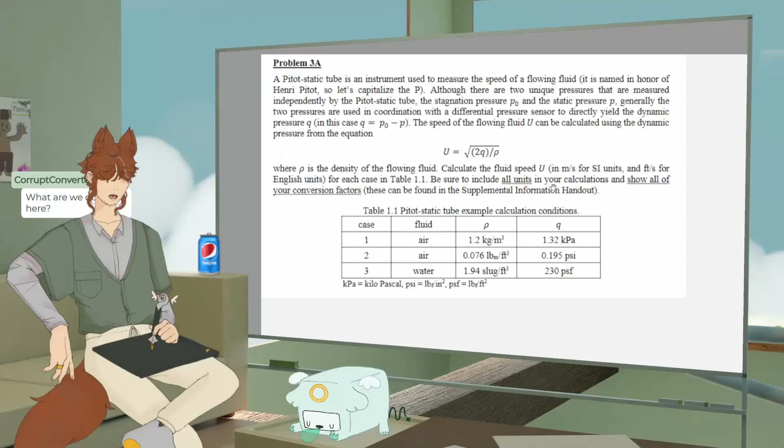Well, this is a series solution to a linear differential equation, but we're actually doing fluid mechanics. Oh, I forgot if I have to put my heading. Okay, we're gonna turn off the heading, we're gonna turn off the heading. I have to do my stuff on engineering paper. Whoops, don't look at that. But yeah, I'm an engineer, I'm a mechanical engineer in undergrad, taking a fluid mechanics course, so we do fun stuff here.

Generally my VODs, or my streams, are kind of all over the place because I'm learning the stuff, I'm not teaching it. Sometimes I'll teach it, but that's usually not when I'm taking a course. So yeah, we just hang out, we just chill out, we do some math, we do some physics stuff, we do some complicated math sometimes. It's usually not that hard math, honestly.

Yeah, so for this one, let's see. So we have a Pitot static tube, which is like a little tube that we use, that uses differential pressure. Two unique pressures measured independently, stagnation pressure and static pressure, and then a differential between them, and we can figure out the dynamic pressure.

I think this is a units question. Calculate fluid speed U in each case. So we can do that. But we have to make sure we do the units correctly.

So let's say for case 1, like, writing is important in classes like these. Math has largely been investigating tessarines much deeper than they have been before. Ooh, that's exciting. A lot of the math that I do is very applied. Even when I did comp sci stuff, it was mostly for AI, like linear algebra for AI, or matrix manipulation, things like that. So I started learning real analysis at one point, but have not got back into that, sadly. I like it though, it's really cool. I want to do more theoretical math, but it's hard because I haven't, it's a lot of proofs. Writing proofs is hard when you haven't gotten instruction on how to read proofs.

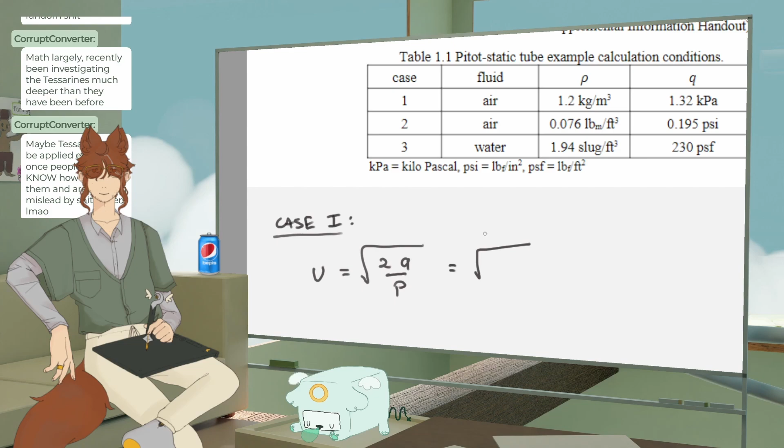Maybe tessarines will be applied eventually once people actually know how to use them and aren't being misled by bad papers. Wait, what are they? Is it a geometric?

Tessarines, let's see. Bicomplex number. Complex numbers are... split? I don't even know what split complex numbers are.

You want to try? I mean, if you have a good introductory definition. I always find it's a good way to test your knowledge by trying to explain things. Although I've heard in math, people are like, well, I can't explain anything because my field of study, people don't know enough for me to be able to tell them. There's too many words. Give me a sec to explain. But as an engineer who deals with things that are also complicated, I never really have an issue, but maybe it's because it's applied. It's a little easier.

Let's see, I'm just going to go into regular units. So 1.32 times 1,000 pascals. We love our units here. So Pascal is force per area, so that would be pounds force. Nope, we're in newtons, newtons per meters squared. And then kg per meters cubed.

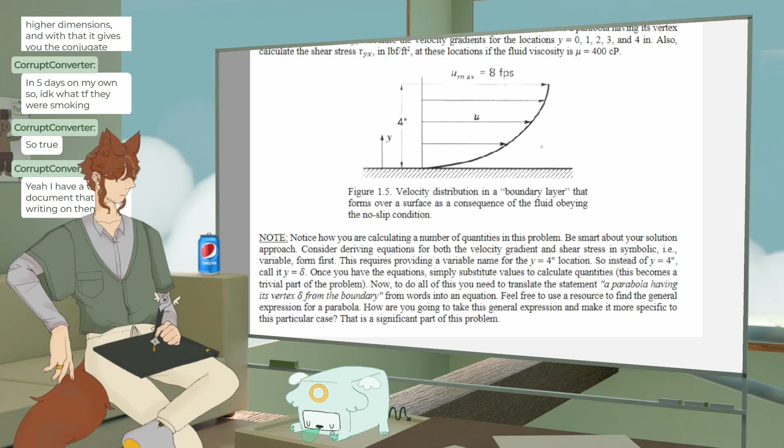No, that's so real though, because sometimes I'm like, oh I get this, and it's like, why did other people not see that? But I think it's just because—I don't know, when you're still in school your brain is really flexy, and it takes longer as you get older to flex that brain. The whole document thing you're writing? Wait, you're in high school? That's crazy, dude, that's awesome.

Okay, assuming velocity distribution profile, whatever, shown in the diagram, which is a parabola having its vertex 4 inches from the boundary. Having its vertex... oh I see, it's this way. Okay, I have to remember what that equation is.

My school helps me with none of this at all. Yeah, that's how I feel.

Calculate the velocity gradients for the locations. Also calculate the shear stress. Let's do the—wait, calculate the velocity gradients. Can I do that right now? I may not be able to do that. Notice how you're calculating number of quantities. Consider deriving equations—I don't know if I can do that.

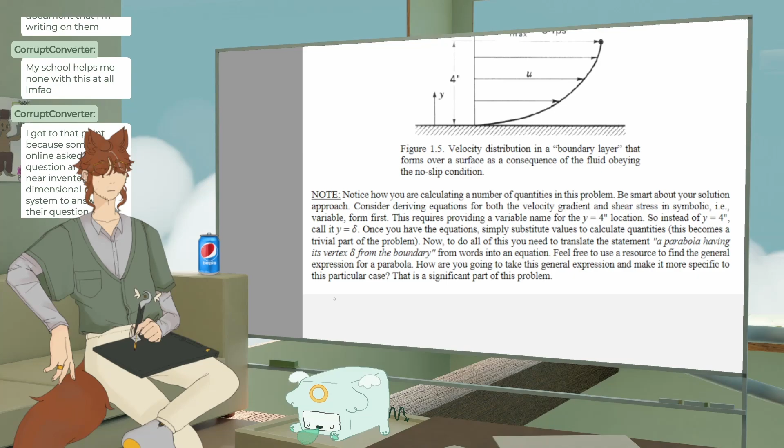Maybe I can, so it would be... I mean, I can calculate... wait, okay no, I maybe can. Can I? I have one equation. Well, to preface, I started learning stuff from this class before my professor got to it, so I know more. But the only thing he's actually given us is just this.

Nope, wait, which side is it? Let me remember, I think it's this way. What is it? Tau-yx? I don't know, it depends on the plane. It's the only equation we have. So I don't... this is the deformation rate, but that's not the velocity. But it could be the velocity gradient, because gradient is like, hand-waving, a distribution, right?

Got to the point because some bozo online asked me a question. I damn near invented a 4-dimensional number system to answer the question they asked about why, if you conjugate everything on both sides of the equation, negating all instances of i, the equation still holds true.

But wouldn't that be inherently true, hopefully, for a coordinate system? Oh wait, no, if you conjugate everything. That is interesting. Because that wouldn't be the case for like... it wouldn't be the case for regular complex numbers, right? I mean, not necessarily, inherently. When you say conjugate, are you saying like x equals a plus bi? Are you saying you're multiplying both sides by whatever's over here, and then just times this? Or like its own conjugate? It's not true for the real numbers, yeah.

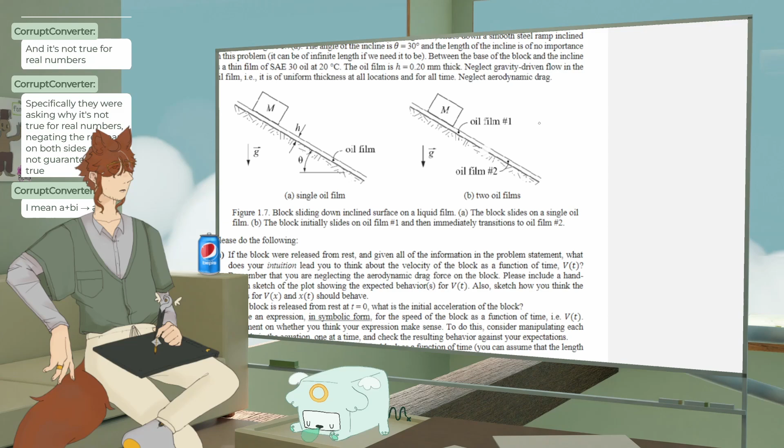Basically, they were asking for why it's not true for real numbers. Negating the real part on both sides does not guarantee it is still true. Oh, well that makes sense, right? Doesn't that make sense? Because aren't you sort of changing the numbers, in a very dumb way of putting it. Maybe I'm not understanding. Also, wait, so the BI counts as the real part? Or... in your complex part is the CD? Stuff? Both of the two?

Okay, yeah, I could do this one. Alright, so we have a copper block, and a smooth steel ramp. This is such a big problem it doesn't even fit on the slide. bi is imaginary part. Oh, not tessarines. Got it.

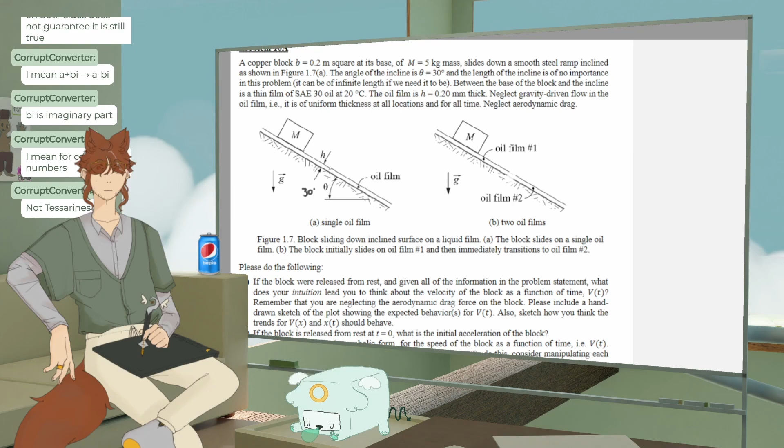We got an angle of incline, 30 degrees, put in there. And the length of the incline is of no importance in this problem. Between the base of the block and the incline is a thin film of SAE30 oil. Okay, that's important, gonna have to look that up in a table for viscosity. Neglect gravity-driven flow by oil film. Okay. Neglect aerodynamic drag. Okay.

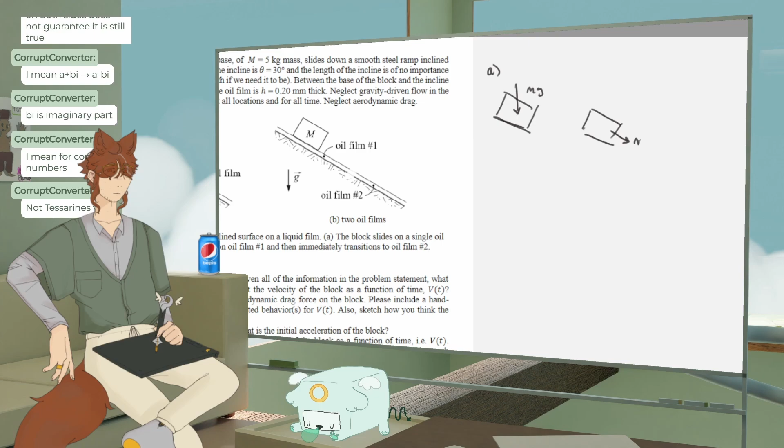Block released from rest, and given all the information in the problem statement, what does your intuition lead you to think about the velocity of the block? There's probably some, here we'll do A over here. Probably some, okay, remember you're neglecting the aerodynamic drag force. So you'd have your block, and you would have gravity, just a simple little FBD, and then that would cause some acceleration on the block in that direction.

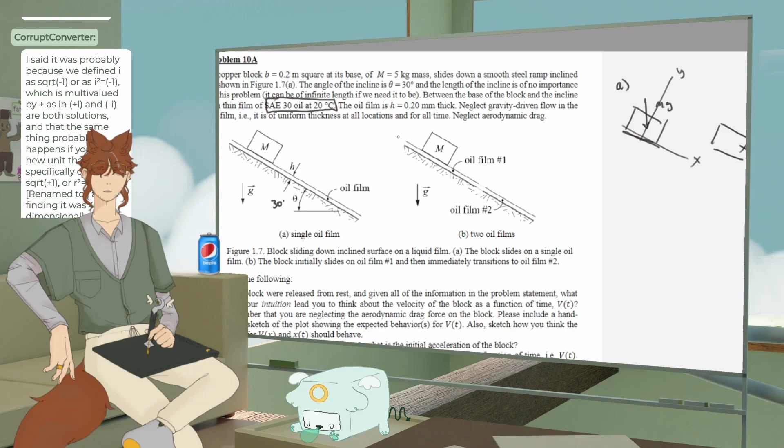And would it be constant? I think what we're saying, we're neglecting gravity-driven flow, so we're gonna assume that - okay, we're not neglecting the fact that the oil needs time to start up as well, I guess. So I think this acceleration would change, but it would get to a point where it's steady. At the beginning, it would change because the velocity of the oil is also sort of getting to the point where it's... maybe the block would be driving that, so its acceleration wouldn't be. There'd be some amount of force though. I don't know, I don't think it would be mostly. It would probably mostly look like a constant acceleration, I guess. So something like that.

Let's see, I said it was probably because we defined I as square root of -1, or I squared equals -1. Wait, let me read in a bigger thing here, those eyes are too small for my eyes. Let's see, which is multi-valued plus or minus, as in plus I and minus I are both solutions, and the same thing probably happens if you add a new unit that is specifically defined as square root of +1, or... yeah, that makes sense.

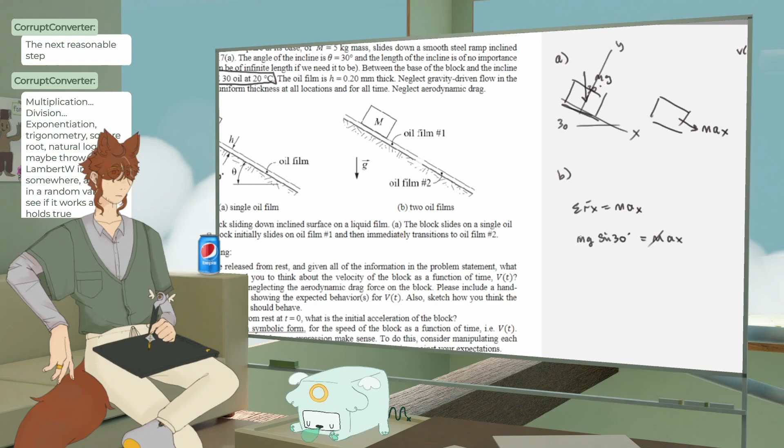What are we in? We are in kilograms, so it'll be 9.8 sine 30 equals ax equals...

The exponential series and the main four trig function series are the most useful things I've had thus far. How are you defining them? Like series as in sums, or series as in just a chunk of stuff?

9.8 sine 30, 4.9, oh that's nice. And that's in, I should put units on this number. 9.8 meters per second squared, and that's meters per second squared.

Derive an expression in symbolic form for the speed of the block as a function of time. Comment on whether you think your expression makes sense. Okay, that's easy, we take an integral. Integral of a dt equals v.

Something like that. Oh, infinite series, oh that's cool. So just like power series versions of them, or...

It's like what I'm doing in differential equations. It's funny because what we're doing this class for is like Laplace transforms for that stuff, but all about having a metal rod with a temperature at one end, and how that temperature propagates in various situations over to the other end. It's like a whole class just about that. The power or Taylor series, that's cool.

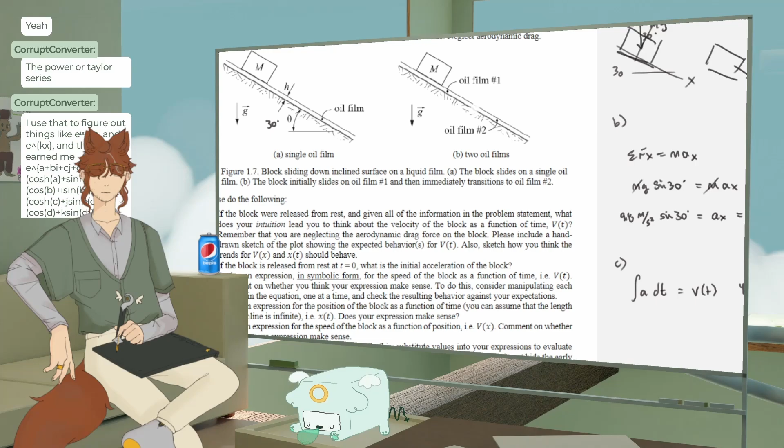So you're just proving that those things hold true as well? Or just having ways of that's like very... How did you get into doing math stuff? My high school would never have had me do that stuff.

I need another force, I need another equation. It's loading.

Yeah, only having one equation for like this rate of deformation. I stopped listening to myself. That's true.

Yeah, I like to teach myself stuff. It's more fun that way, for sure. Better experience, I think. But you know, I will say there are good professors you'll meet if you go and meet professors, I guess, is the caveat there.

Let me also grab my... I'll put that up, supporting documents, sulfuric acid. Good supporting document, just called sulfuric acid.

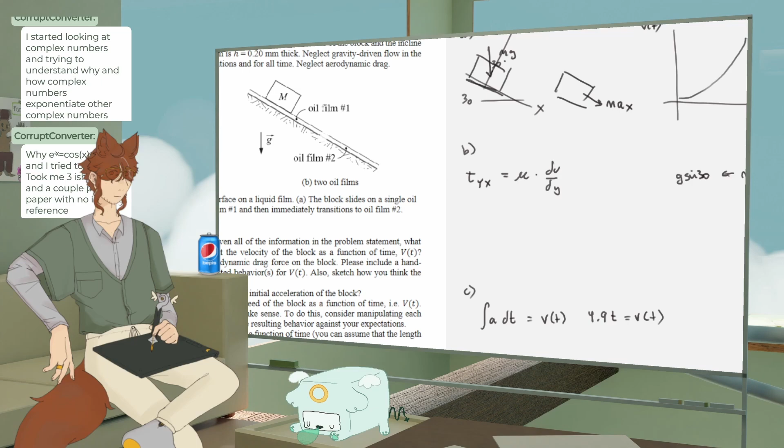Talking about complex numbers - exciting, interesting. Started looking at complex numbers and trying to understand why and how complex numbers exponentiate other complex numbers, why e to the ix is cos x plus i sine x. I have to try to prove it. Took me 3 days and a couple pieces of paper with no internet reference. Oh, you're just built different, for real. My brother does that kind of stuff, he likes to prove things like that. I was always much more like, I wanna think about models physically. I don't want to have to make models, but I enjoy thinking about the relationships of things, like proportionalities, or direct relationships or inversely proportional. Because I like to go, oh, if I make this thing bigger, this thing will be smaller.

Yeah, du dy. I think there's got to be one other thing in here though, because we need something about how du dy.

Okay, so we can define this at least. So this is wrong, get up here. A free body diagram is not free - there's a force this way, somehow. Well, I'll call it F. I don't know.

Be an entire Desmos - wait, did you say library? Whoa, what? Built different, autism. Hell yeah. Dude, I think neurodivergency is just like... that's how we get certain great things in the world. You know, find your niche and just go all in. Being a jack of all trades is no fun. I love people who zero in.

Okay, this is G sine 30. I'm gonna leave it in, I'll just call it A for now. Well, I guess A is not gonna change, so I'll do 0.2 meters squared, I'll just square the whole thing. Okay, so we have this as a known, and this is a known, which means we can find this.

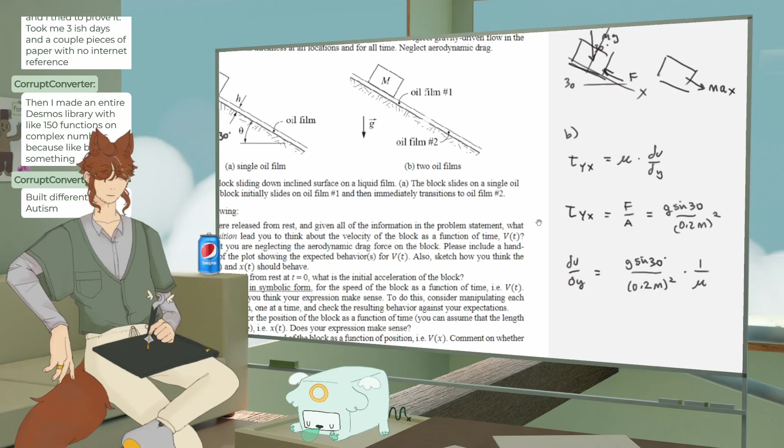It's like du dy is gonna equal G sine 30 - I guess I could even put theta in there, but theta is not going to change, so they're not really asking us for a changing thing, that's fine - divided by, times 1 over the viscosity, which is going to change from this, if in the second example the oil films. So we got that. Now there has to be something about this deformation and the proportional stuff.

Okay, is that for non-Newtonian stuff? Oh, I gotta read that later. Surface tension, okay, that's not super useful. This viscid and inviscid, or viscous and inviscid. Laminar, yeah. Okay, useful definition of streamlines, I should look at that. Shear stress for a non-Newtonian fluid - that is, I want a Newtonian fluid.

Wait, oh that's fine, is it a 1D flow? Yeah, it's a 1D flow, don't need to worry about the dimensionality of flow. Where is this, do I need fluid dynamics? But the next chapter is fluid statics. I don't understand, we need something to determine - unless it's just a one variable equation, but that seems way too easy, it's definitely not it.

Okay, now we get into differential equations. Thank you, the gradient. Let's see, the pressure gradient is equal to the specific - I don't care if it's equal to specific gravity, I don't need that, I don't need a pressure gradient, bro.

Oh my gosh, you have a little link to it. That's so cool, wait, let's see. I love it. Whoa! Oh my gosh. Wait, wait, that is so cool. Wait, we're going on a field trip. Look at this, that's so beautiful. What the heck? Wait, that's so gorgeous. Oh, it's so beautiful. What's the red? Whoa! Oh my gosh, you can change it like with this?

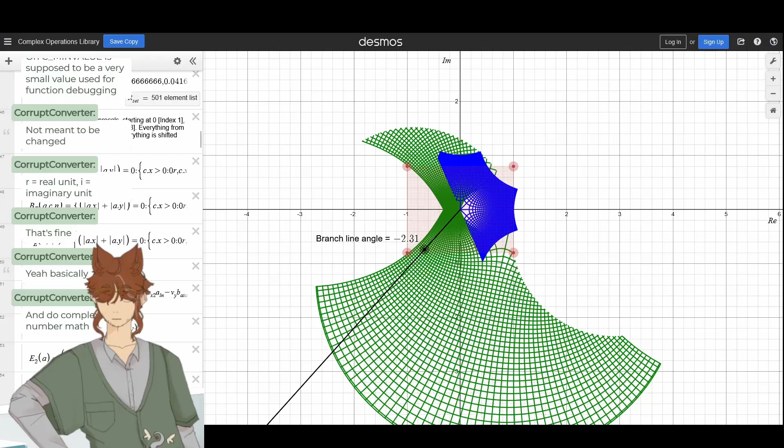Oh, so you can just import these functions into something that you wanted to do, and then you can draw it. That's where you change it, I see. Whoa, that's really cool. How do you, what even is this?

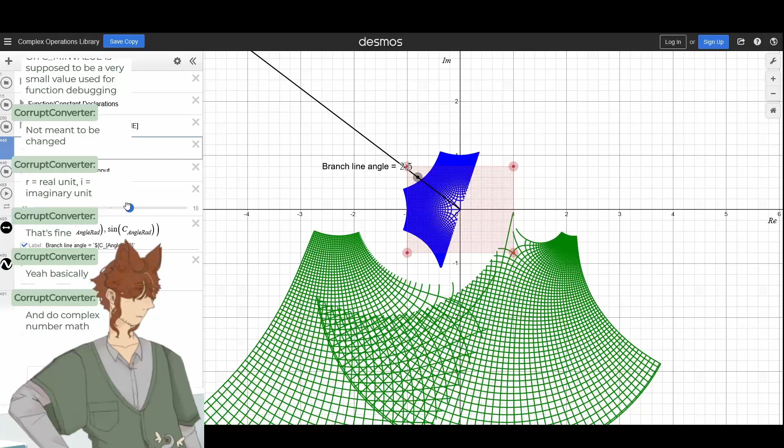That's crazy, I can't believe you made this. This is like awesome. This is like actually really, really cool.

Wait, I can play it and it goes around in a circle. Wow, it's like my baby sensory. I love math. Dude, people who can do this stuff are like wizards to me. This is like spell casting.

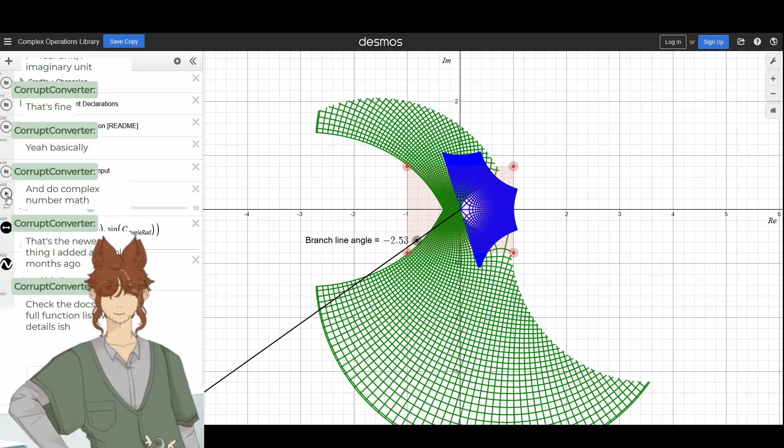This is literally just, check the docs for the full function list. Oh yeah, I've been opening the full function list. I just haven't, you can't, the chat is in the way. Get out of there.

I like how you put in colors as well, that's awesome. This section is unfinished. The shape reminds me of a Mobius transform. Oh, the README folder? Where is that? Oh, here.

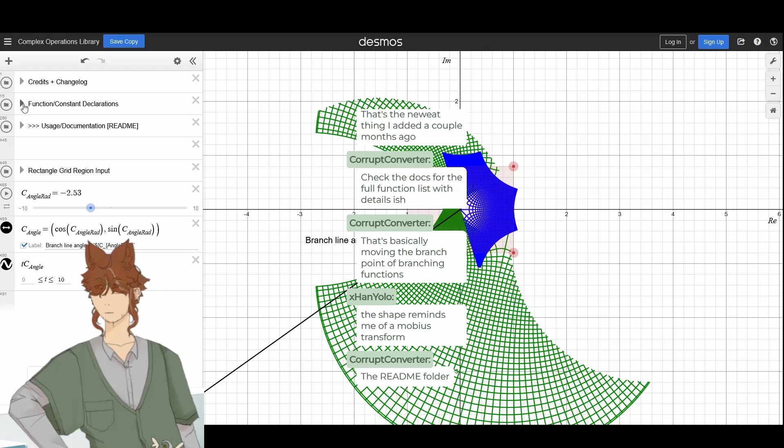The real unit, okay so it's real and that's a match. Oh look, you even labeled the axes. Oh my god, you're cracked. Okay, to access the real part of P, use P dot X, imaginary part P dot Y. E circle, return complex point.

This is such a cool visualization. How did you make the swirly graph thing? Like, I never label my axes. Oh, I always label my axes because, okay.

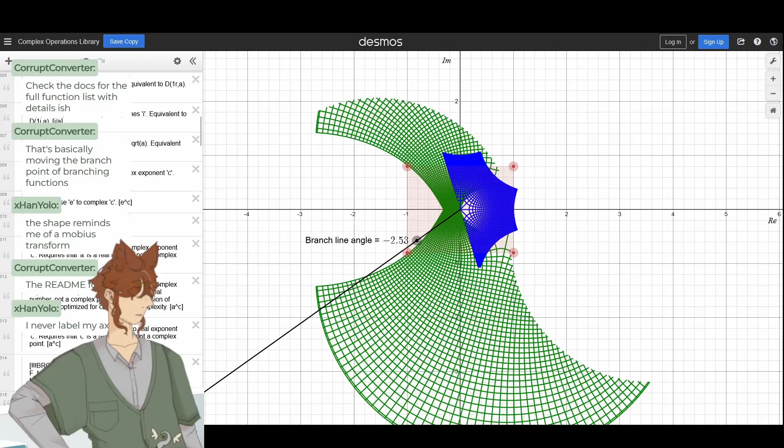In engineering, people like to label their axes whatever the hell. I don't like how Minecraft uses messed up axes, and so I just never assume, so I always label mine.

Tetrate infinite, what? These are so cool, E to the complex C. Wait, does it also graph? If you just say like, I don't know how to write this. Wait, give me something cool to write.

That's the last folder, takes the grid and plugs everything into it through a complex function. Oh, I see, P grid A. Oh, let me move.

Units are a waste of paper? No, literally, you can't. In engineering, they crucify you if you don't write all your units. Change this to modify the density of the grid. Whoa, I can make it big as hell. That's awesome.

This is so cool, everybody go look at the link, it was in chat. From me putting chat in the way, just replace everything after the equal sign in the P grid A. P grid A, replace it with what?

Oh, to graph something cool? Oh I see, I don't know what I would put. Like, can I put sine x? No, no I can't. No, I can't, I don't know. Like with F cosine, F underscore.

Oh, F underscore like that? No, have to replace everything. I see, we can't have a cool rectangle. Wait, when you say underscore, do you mean like sub? Really, like that?

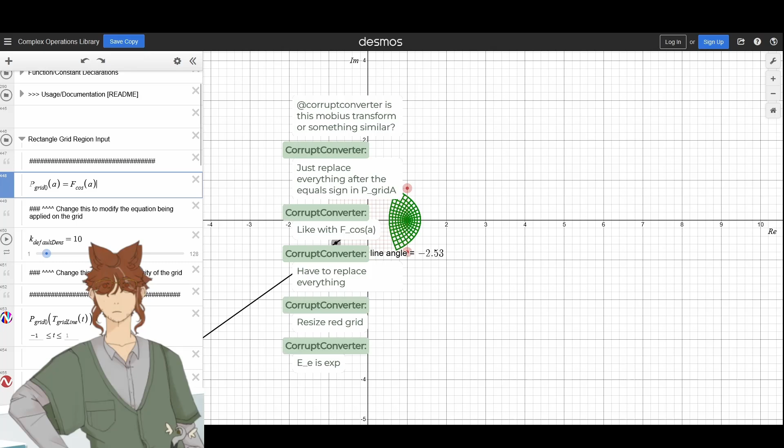Whoa! Wow! That's so sick, how do you? Whoa! What is that? What does it going down like that mean? Where is it? Because that means it's in the imaginary space, right? And any real bit is along the real axis. That's wacky. That is so sick, though.

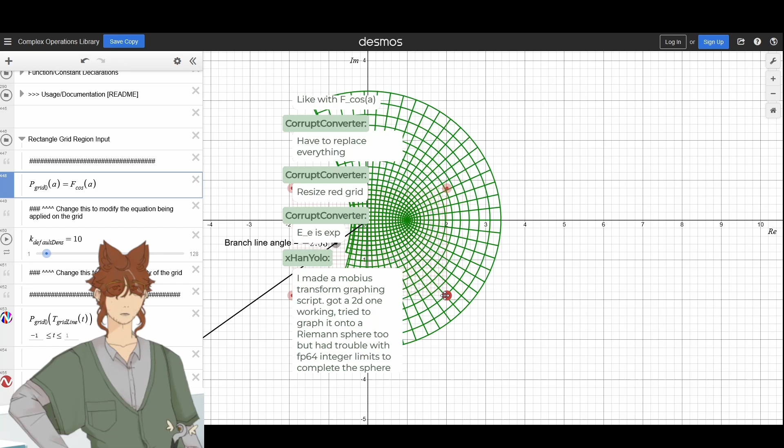Holy shit, what? So if it was only like 2, we put it only here. It doesn't make cosine. Could you make just a regular cosine function? I guess if you did like this. Wait, where's 1?

The box is not exactly the box. Wait, that's so weird. What are the limits of the box based on? Doesn't seem like... I mean, I guess maybe that's not pi though. That's also not pi.

E is exponential. I made a Mobius transform graphing script, got a 2D one working, tried to graph it onto a Riemann sphere too, but had trouble with it. That's you guys are like, okay let me do my stress analysis, FEA, I'm gonna put it into SolidWorks. You guys are built different. I don't know what to say. That's awesome.

Oh, I put the chat right over the... I was just doing like this, going woo. And the red grid lines as a set of complex points, plugging them into the function. That's really neat, that's awesome.

It's like a mouth. That's complex cosine. Oh wait, is it kind of looks like it's like almost an optical illusion of a column? Do you see that? That's kind of swag.

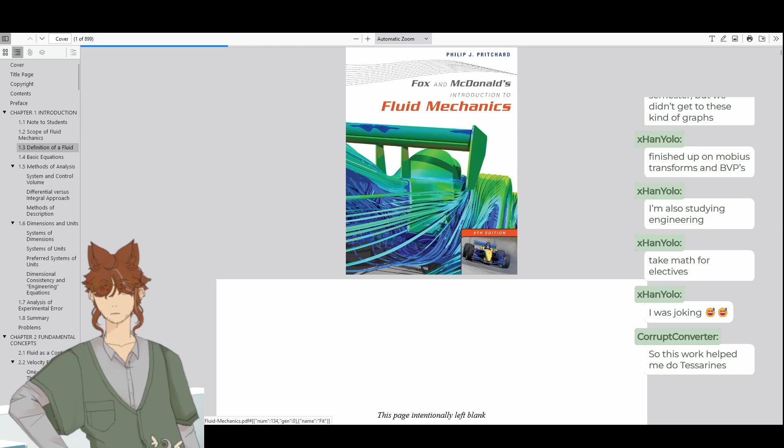Oh, I was joking, I might take a math minor though, I love math. So this work helped me do tessarines. That's so cool, tessarine is like a beautiful word. It's like, that's an awesome word.

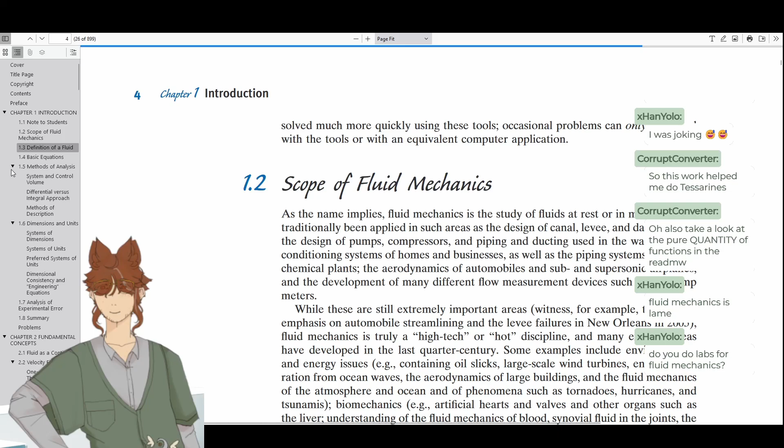Wait, this is different... What? It has different headings? A what? A what? Chapter 3, Fluid Statics. Wait, I'm not in chapter... oh oops, I'm in chapter 1. Wait, I need to go to chapter 3. Why are they all open?

Basic equations. Can I just go to the end equations so we can see if they give me anything I can work with? Okay, pressure variation... no, I'm not looking at any of that. I need something about the resistance. I need the resistance. Fluid mechanics is lame.

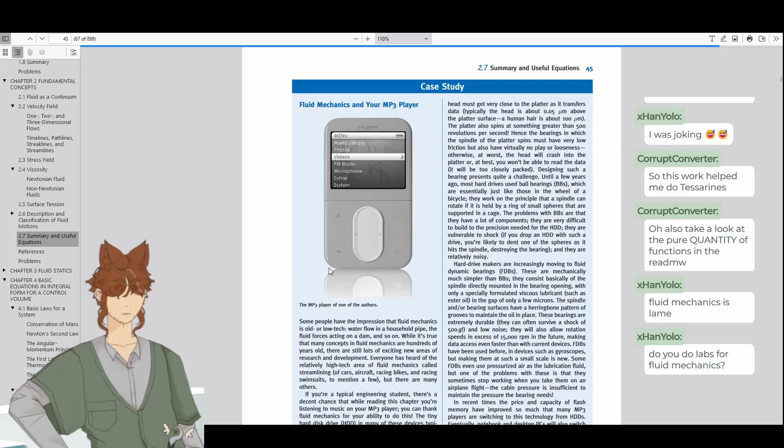I love fluid mechanics, fluid mechanics is the best. Do you do labs? No, we don't have labs for fluids. It's just chunking fluid mechanics in your MP3 player. Everybody wants to know.

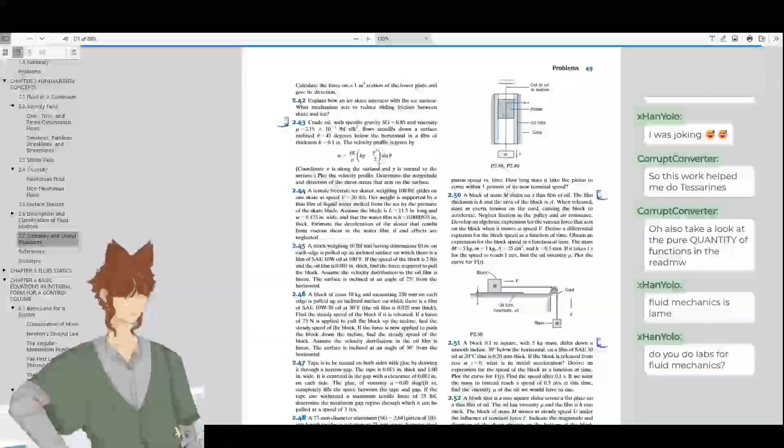Okay, let's see, is there any dynamics problem they do? They literally just missing the way we connect the dynamics to the thing. Reynolds number equals VL over... wait, no, that's... wait, in chapter 7, what? Characteristic and flow, viscous effects. Okay, that's not it. Oh wait, no, that is maybe, but it's like a shear. That's the only thing, it's not like submerged in water.

It's actually very contextual, my professor is pretty good. This is due, actually it's due in 5 days, so hopefully he would have taught us some of this stuff. But I think there's just one little bit that I'm missing.

So this is, okay, let's see, the shear stress on the upper plate. Wait, my brain, it's thinking. I think maybe I did it backwards is the thing.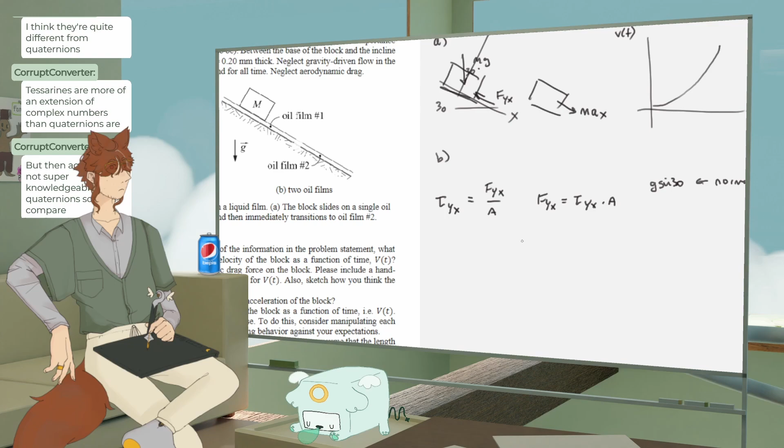I think they're quite different from quaternions. They're more an extension of complex numbers than quaternions are. Yeah, that's true, they are both sort of fourth dimensional things, which might be why they seem similar to...

Oh god, there needs to be a theta on that. Okay, let's leave it in theta for now, I don't want to deal with that.

We can find the G of SAE oil. Where's my 44-page packet with all of my fluid properties in it? Sorry, that was Velcro. Wait, I could just look this up, it would be easier than looking at my packet. SAE oil 30 G. There we go. Okay, well it's not giving me the G. G property, fluid mechanics, what is it?

What does G mean? Oh, specific weight. Okay, that's the density divided by the density of water? No, it's the density times gravity.

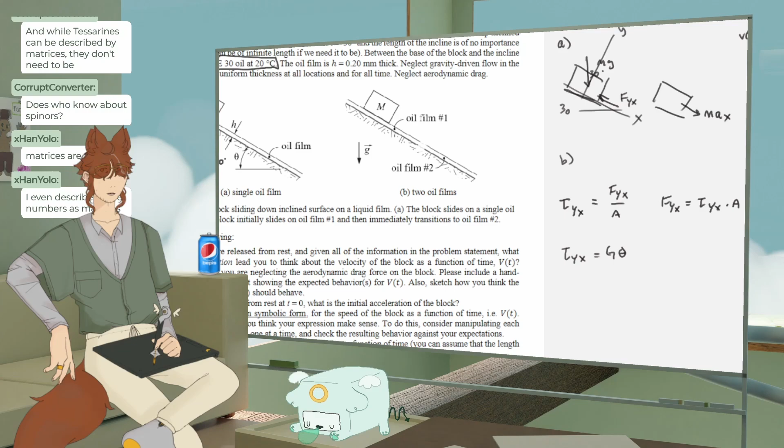G effective—yeah, whoa, that's not it. It's the specific weight. Okay, specific weight is density times... not density, density times stuff. Density times gravity. So I'm gonna just leave it like this: density times gravity times theta.

Which means that F equals rho g theta A. Alright, now theta is going to be the deformation, the angle of deformation of the fluid element. So that's going to take a time to get up to a steady state—it'll slowly go, but there will be a theta that we end at.

I even describe single numbers as matrices. Yeah, that's true, this means seemingly it might be easier to work with and derive stuff for in non-matrix form.

I don't touch linear algebra with complex variables until next semester. We did some—wait, no, we definitely did some, because we did eigenspaces. We did phase spaces and eigenvalues that are complex, and both of those require... whoops, I turned off my music. Both of those require complex numbers in linear algebra. They're not that hard, I'm surprised you didn't just throw them in there, because they're really not that different.

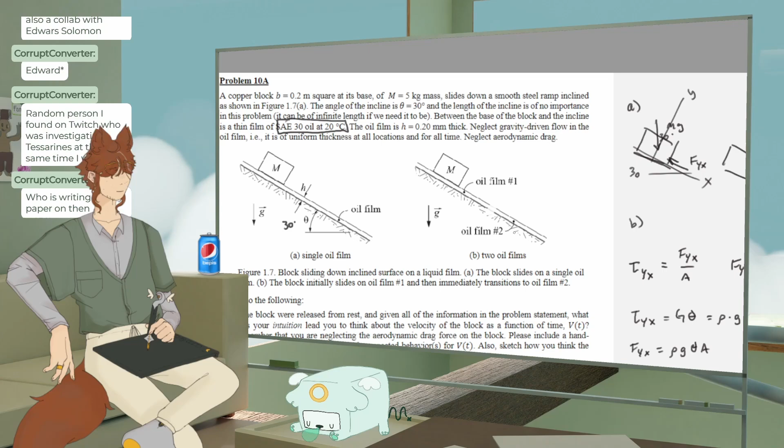Random person I found on Twitch who is investigating tessarines. Wait, that's so crazy. Sorry, I'm slurping up all the math stuff. I'm really not supposed to be in the math category, but Twitch wouldn't care.

Okay, so we've got gravity in the positive direction, so that's mg. What do we got? Cosine, lol. Nope, it's sine, I swear I'm an engineer. Minus that rho g theta a.

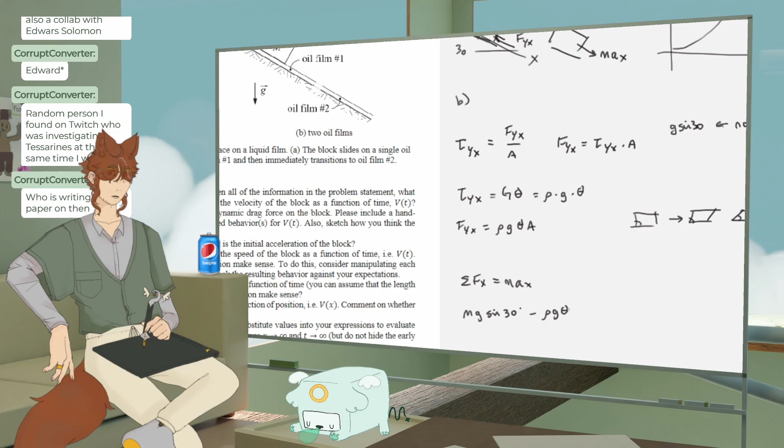Now theta is kind of sticky, I don't really want to deal with that. Oh well, we can also, so density is, let me do this: g sine 30 minus rho g theta a, divided by m. So density equals mass over volume. And if we divide by mass, we're gonna get 1 over volume. So that's kind of nice, our mass doesn't matter.

Oh, that's, oh wait, I thought you meant you were gonna stream.

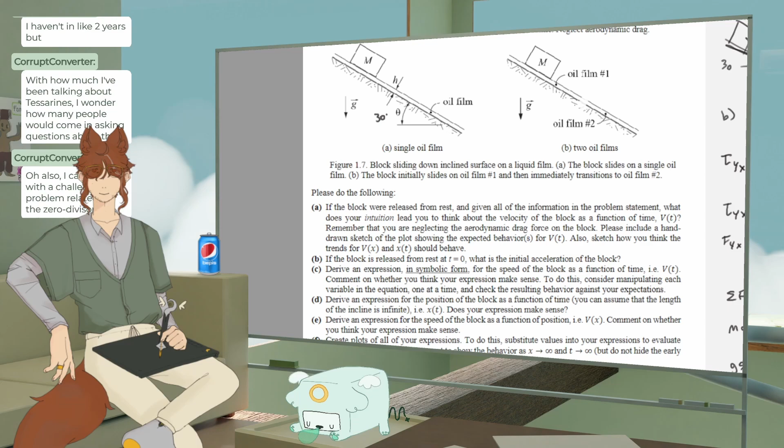I also came up with a challenge problem related to the zero divisors. Oh, drop it. I don't know how many people are in the know about tessarines.

Let's see, so this is theta. We want to say, what do we want to do? We could do, I don't have any tangent, right? We don't want really anything else in there. So tangent is this one, height, so h over, right, V2 minus, or delta V. Yeah, I'm gonna say V2 minus V1.

Okay, let's see how well I copy-paste a multi-line message into single-line Twitch chat. I don't know, it should be okay. Oh, it's bigger than 500 characters.

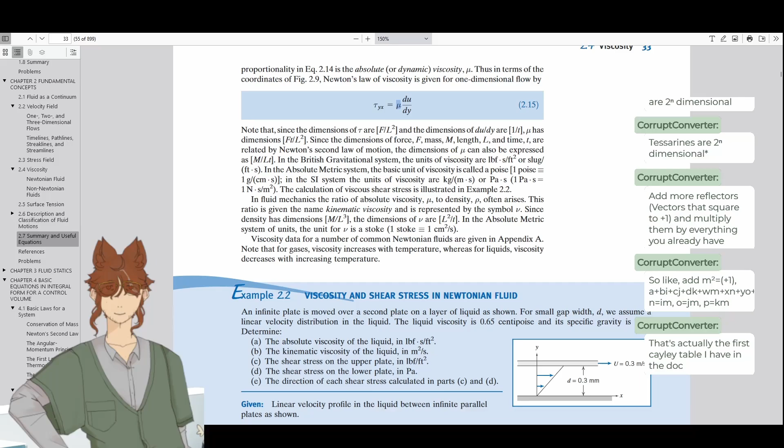Wait, no wait, I did write it on the wrong side, didn't I? tau equals mu... no, I didn't, I'm tripping.

SAE 30W is harder to stir than water, it's much more viscous. Wait, okay, did I look at the wrong one? That's 15W! What, it didn't give me 30? Are you kidding me, I searched 30. Oh, you little stinker. Wait, SAE 30W, I'm probably looking at the wrong oil then.

So like, add m squared plus 1. Whoa, that's so many letters. WM plus XN plus YO plus ZP? What, N equals IM, O equals JM, P equals KM. Oh, I see. He does not see.

Wait, so you have your regular tessarine, and then which is up to the DK, Donkey Kong. Donkey Kong is here, sorry. WM, what is W? XN plus YO. I don't know what the W is, that's the only thing I don't know. That's the first Cayley table I have in the doc. Oh, that's crazy.

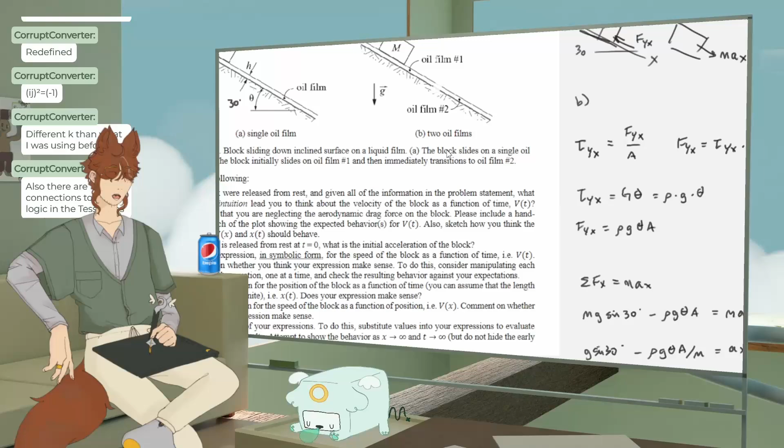Alright, well, let's maybe just do it. So this is a constant. What's our non-constant? This is a constant, this is a constant. It's all constants. Wait, it's all a constant. Bruh.

Because if I had theta as a function of... if it was theta of t equals blah blah blah blah, then we would have a t in there to differentiate with. But we don't have a t, because how will we define theta as a function of time? You would have to figure out the acceleration of the fluid, and then say the difference in velocities as a function of time. But the difference in velocities...

Wow, that's kind of scuffed, isn't it? You would have to define the velocities as functions of t of themselves. Is this in a steady field? Would it be steady?

Is it uniform thickness at all locations? Would it be steady? I feel like once it hits a state, it would be steady.

The dollar signs aren't rendering. Or they're just rendering as dollar signs. Let me try that in the first one. Yeah, okay, well let's field trip it up. Here we go: Q equals A plus BJ.

X equals ln(n minus 1), A minus B. P equals ln(n minus 1), A plus B. Ln(A plus BJ) is 0.5X plus P plus J(X minus P). Whoa, how did you prove that?

Well, X minus P would be like natural logs, divided by each other, right? Which I guess you could prove. You'd get A squared plus B squared on the bottom, and then—wait, no, I lied, you would get A squared plus B squared on top. And wait, what am I talking about? How would you do anything with that?

I guess you could do A squared plus B squared on the bottom, and then—oh cool, because A and B are just numbers—I'll explain it in the document. Oh, it was a whole chain? Oh god, okay. I'm getting spoilers for the end.

Okay, we're trying to find the velocity gradient, which is our—we'll say du/dy, the velocity gradient, times the viscosity is equal to the shear at any given point. So it looks like we're gonna just make a field.

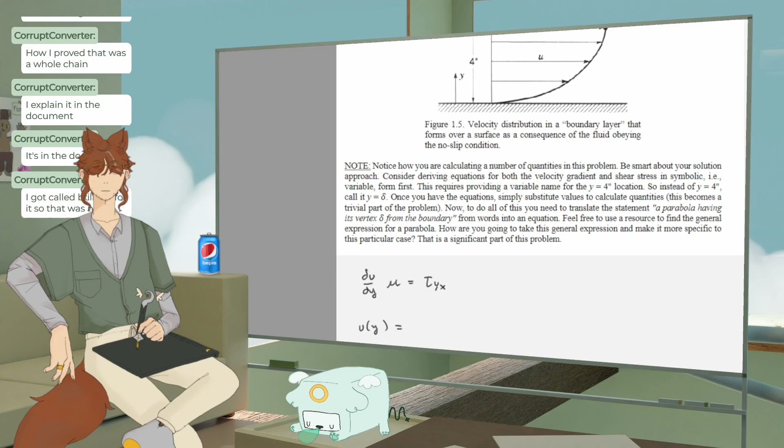So we need u of y equals—okay, sideways parabola equation. Y equals x squared, that's how we do it. So y equals x squared—I want to go in Desmos and mess around, 'cause that'd be fun.

I got called brilliant for it, so that's nice. Holy shit, yeah, that's great. Getting called brilliant is like...

That is not a—X equals y squared, what the hell? So that would be like y equals plus or minus square root of x.

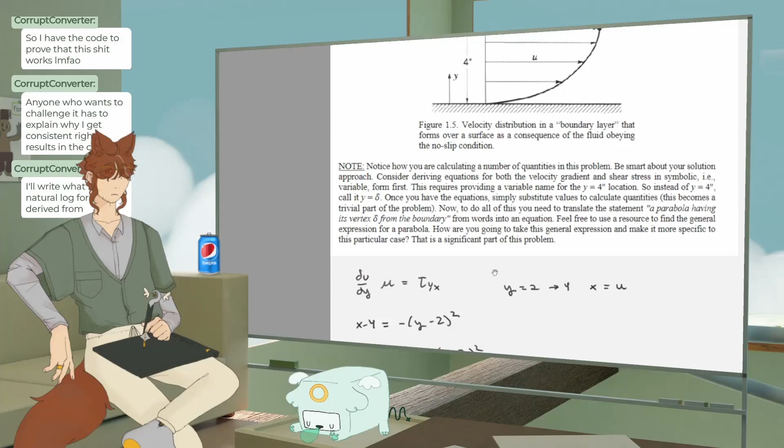So velocity, u of y equals 4 minus y minus 2 squared. That's what our velocity is, in symbolic variable form first. I'm not gonna call it delta, I'm just gonna call it y. Y equals y. Like when we redefine, when we re-index things just to n again.

Okay, so then the gradient of y is just, we take the derivative with respect to it, so I think it's just that. Not 4? Don't know why I put the 4 there, that one's not there, it doesn't keep being there. It's been a while, okay. Negative 2y plus 4, so for y equals 0, we have 4. That's incorrect, that is not correct. Oh wait, no it is correct because it's a slope. What am I talking about? I was like, it's not the velocity there. When y equals 0, we should get 0. -2 squared, 4 minus, yes okay, we do get that for the velocity. But we have a slope. Y equals 1, we get 2. Y equals 2, we get 0. Oh, that's 4 inches, whoops.

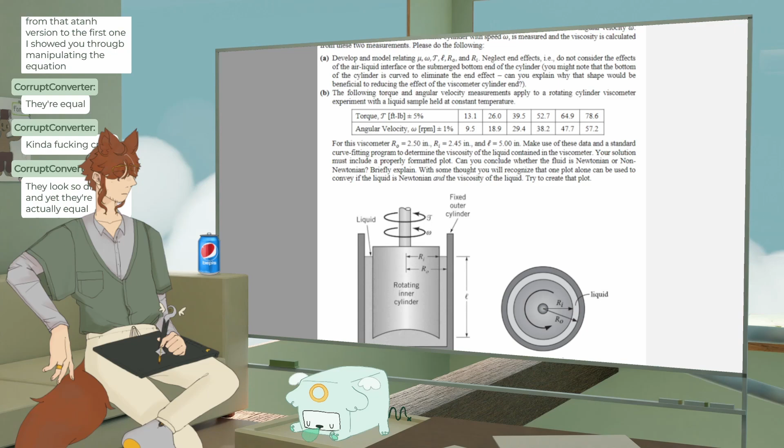Okay, we have to figure out a model. That's great. Well, maybe we start with something we know. Probably Newton. Okay, so we know that the velocity gradient times the viscosity is the shear. So maybe let's figure out some torque.

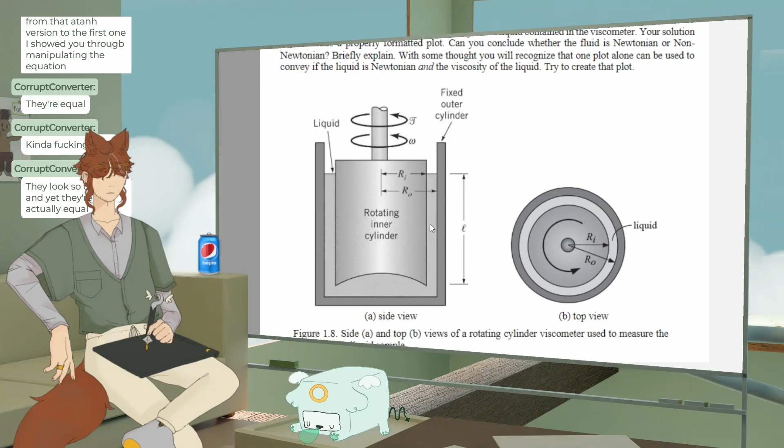This would be, we don't really have, I would say y, x. Actually, it's not going to be that. It's going to be, it would be xy in this case. Normal, and then the direction of the shear. Actually, no, it's not going to be xy, it's going to be xz. What am I talking about? Because it's shearing it this way, or this way. So if this is x, this is x, that's y. Right-hand coordinate system.

What? I think it might be going backwards. Dude, is that right? I feel like that's not right.

What's up? What's up, gamers?

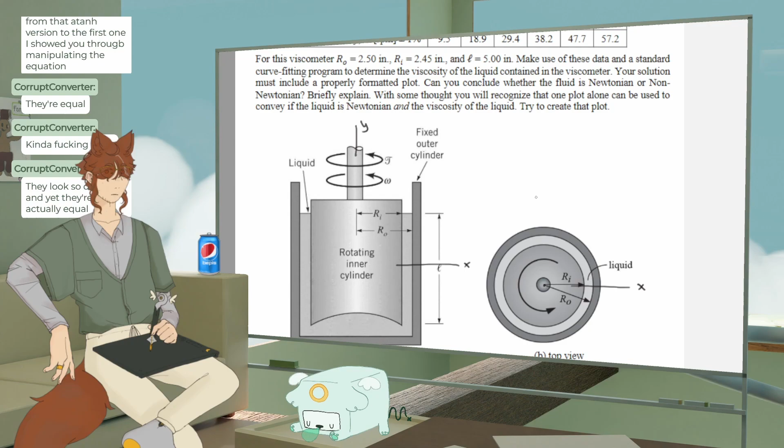Yeah, cause it's not right, I put my fingers in the wrong direction. It does go out. Me when I'm goofy. Okay, so yeah, the shear would be in the z direction. Kind of fun.

Okay, well, what do we know about stuff? Trying to define a shear is probably the best option we have, because we can figure out some torques that we apply. So if we apply a torque to turn something,

it's gonna turn an omega. It's constant speed, so we don't have to worry about acceleration. Well, one thing we know is that torque is proportional to omega, so the more torque we put in, ideally the higher the omega.

And torque is gonna be proportional to 1 over viscosity. Oh, but we know that. Well, I guess not necessarily. That's the shear - this really should be called a different thing. This is going to be torque with a big T.

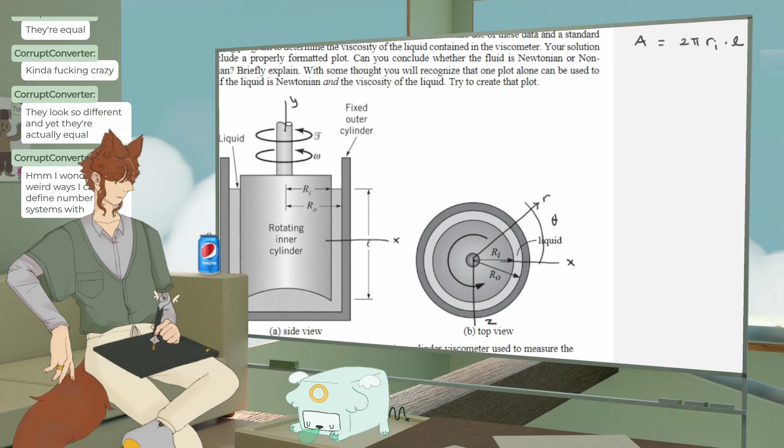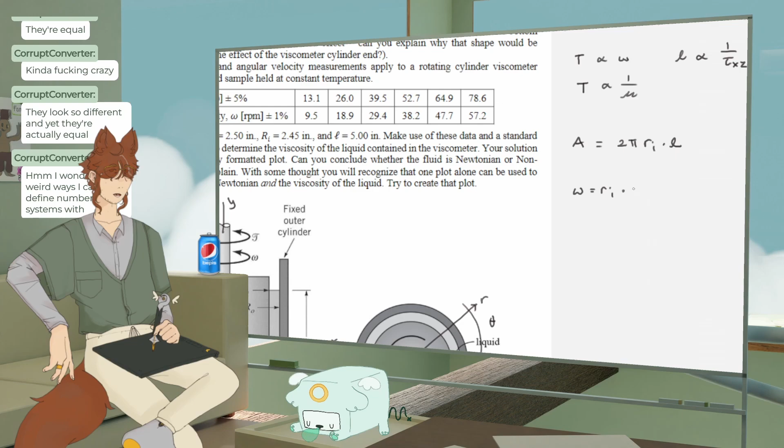I guess omega equals Ri times, what is it? It's like omega equals V/R, right? Times V. And our V, it doesn't really matter. Or wait, what are we trying to find? We're just trying to relate them, I guess.

What do I do if the absolute value... Oh, I see, so you just set some conditions up and try to figure out something that does that stuff. That's cool. See, so the absolute value of A plus BJ equals the absolute value of A minus the absolute value of B. The absolute value of BJ equals minus the absolute value of B? Wait, that sounds so confusing. How would you do that?

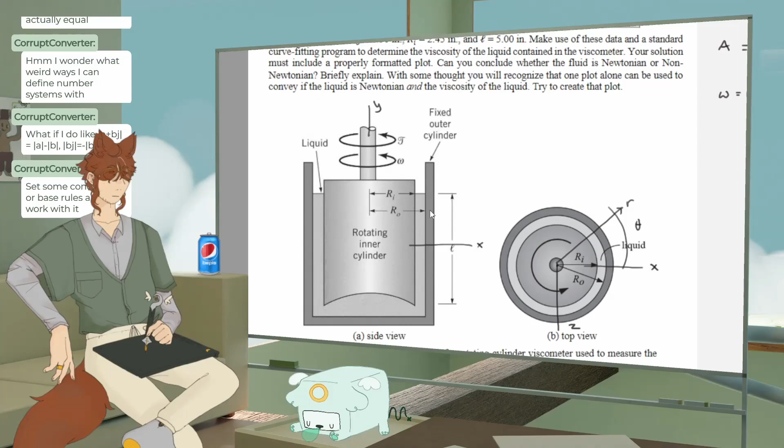I'm trying to think, what would we possibly use R0 for? Ah, okay, well, you know what we can do - the difference between R0 and RI is going to be where we get our... So if we draw a little piece here, it's going to look like this.

I should probably make a control... maybe I do that, I don't know what it's called. Control volume. So this is the cylinder.

He actually draws nicely, he does something like that which I think is quite elegant. Most professors tend to not really draw too nicely. I quite like it. Sort of like that.

I don't know, it's not super nice. The idea is, what if we were able to do negative absolute values? Wait, so are you redefining what an absolute value is then? Or is that just like a pipe?

Not an absolute value, really? Anyway, this is the control volume here. So this is DL. And then we have, I guess it wouldn't really be DL, but it's fine. That's 0 there, and this is omega over R. Omega over R, I guess.

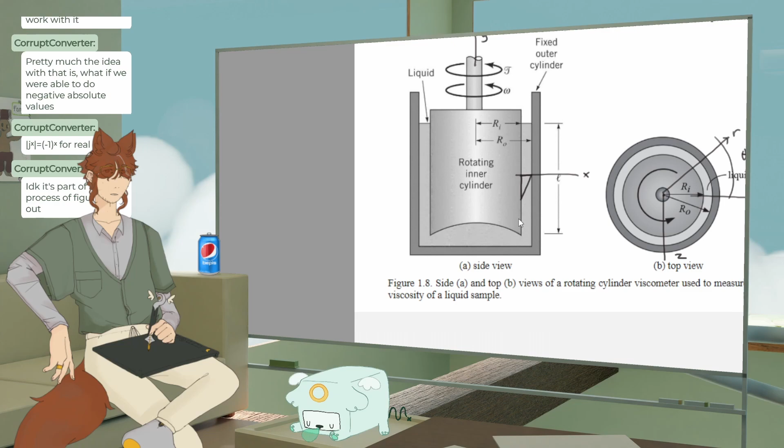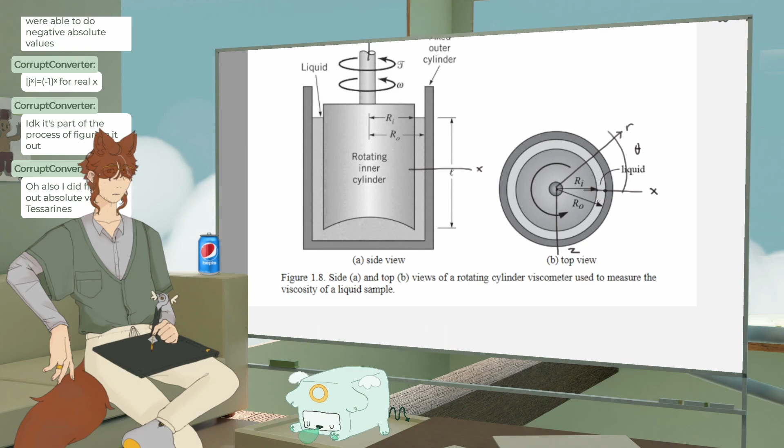No, it's not like that. I lied, this is not like that. It wouldn't be like, wait, I gotta delete all this because I gotta delete that and I don't want to. I drew so many dots. Okay, there we go, it's like rotating around. This is 0, and this is moving this fast. It's like that. So I guess this is our control volume.

We'll do something like that. Just imagine, just take a journey with me.

Something equals -1 for real x. I don't know, it's part of the process of figuring out. Oh, I also did figure out absolute value on Tessarines. Whoa, that's crazy. Wait, did no one else do that stuff before?

This is omega R, that makes sense. Should I say here? I feel like I should maybe say there. I feel like I made this curve way too big. I'm gonna make it kind of like that. I'll do here. Yeah, let's do that, okay, that kind of makes sense, low-key. There we go.

This is omega over R inner, and this is 0. This is U of R? No, yeah, it's a function of R. As you go farther out, it changes.

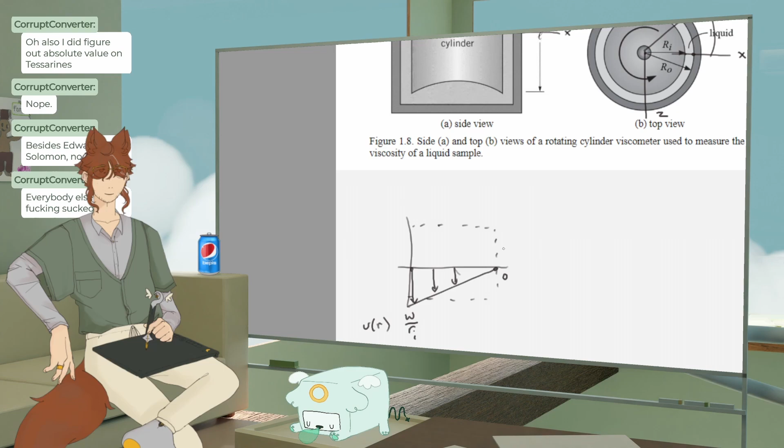Besides Edward Solomon, no. Everybody else fucking sucked. That's so funny.

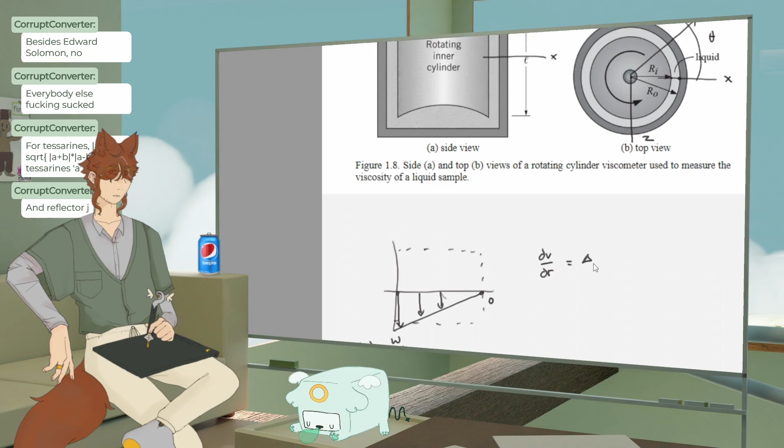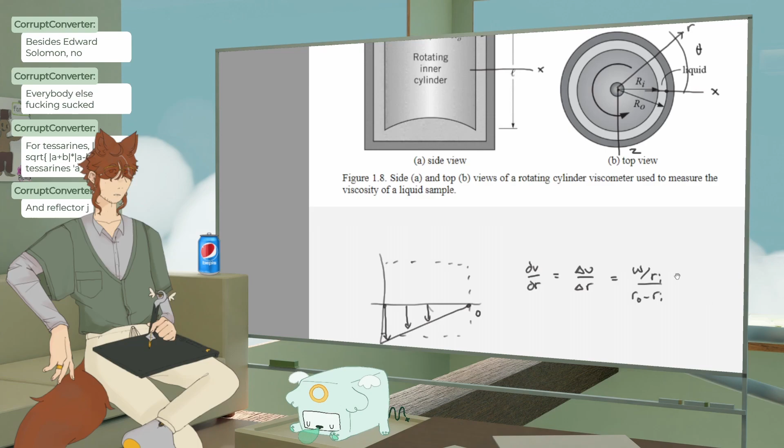That's so funny. So du/dr equals the difference in u over the difference in r. So that would be this over r outer minus r inner. And then we can say, okay, we got one part. We want to propagate this du/dr.

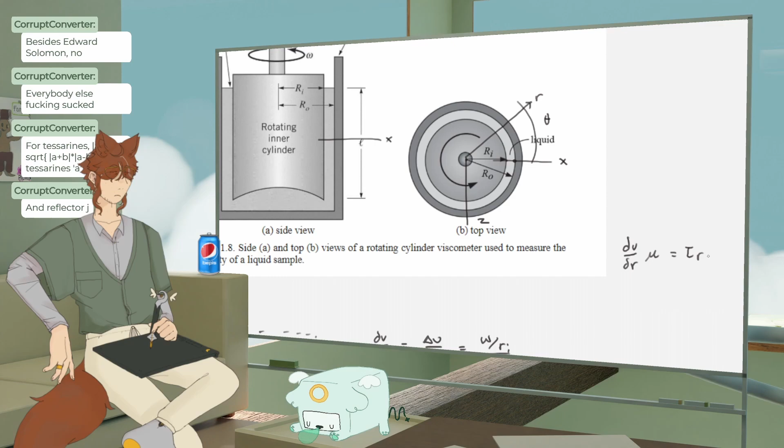Viscosity equals something, probably r theta, I don't know, something like that. For Tessarines, I'm looking, I gotta look closer. This is like an eye exam up in here.

Okay, the absolute value equals square root of the absolute values of the conjugate. Huh, and reflector. So what is a reflector? Is that just the name of the component, like what you call that component of it?

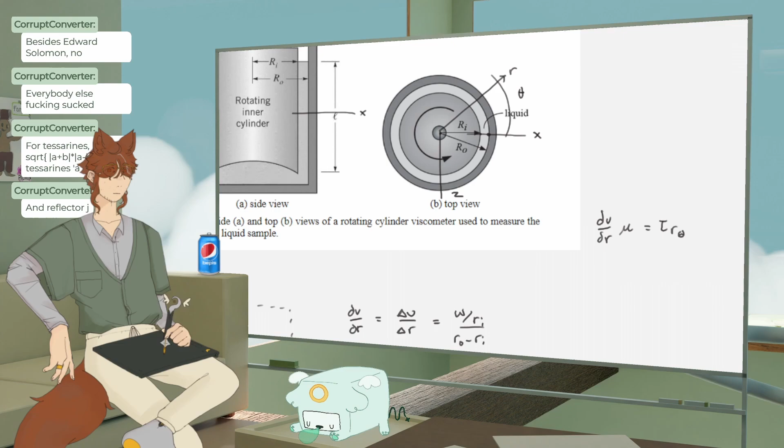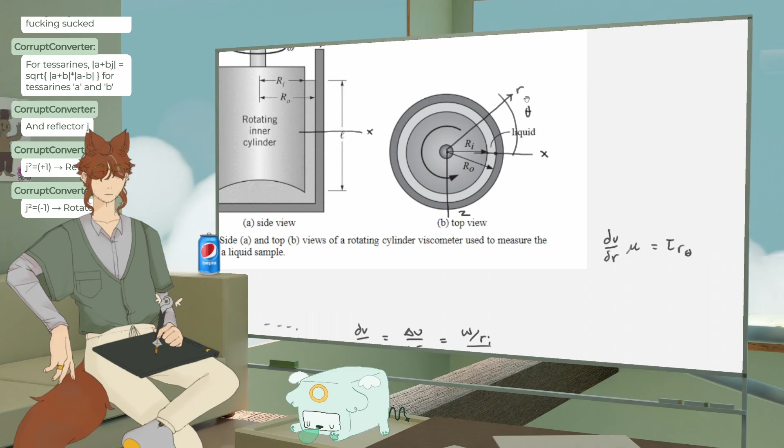Okay, we got a viscosity. We have an omega, omega's in there. Torque is not in here yet. Torque is not in here yet, and L is not in here yet. And I feel like we have to say, I think we have to say torque, this, whatever, R theta equals force over area. I don't see any other way we could do that other than Q, VQ over IT.

And I mean, if we want to say VQ over IT, everything sucks. Everything sucks, man. I don't want to do VQ, because then I have to do the moment of inertia of the cylinder. Ooh, who wants to do a moment of inertia of a cylinder? Gross, gross. This is a good enough approximation for right now.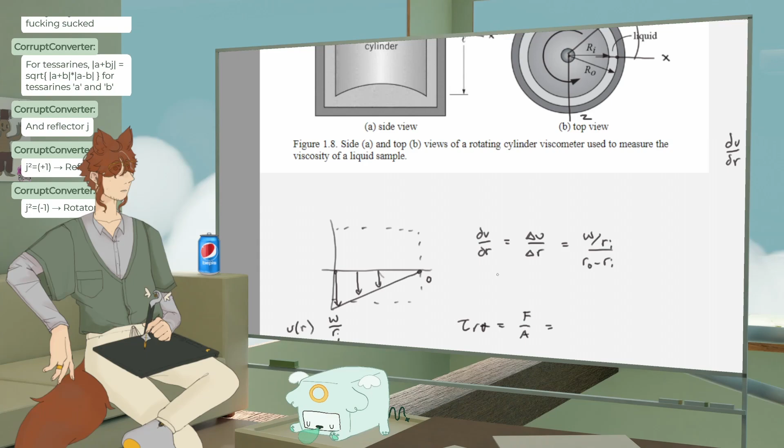It's easy enough for me to switch. I understand what it is. Is this the torque, is the question. I didn't draw a free body diagram. Oh no, what am I even doing? I'm just floundering around in numbers. We don't even have a free body diagram to show for it.

Hello? What kind of an engineer am I? Silly one, the one is. I'm a silly guy. Okay, here's our free body.

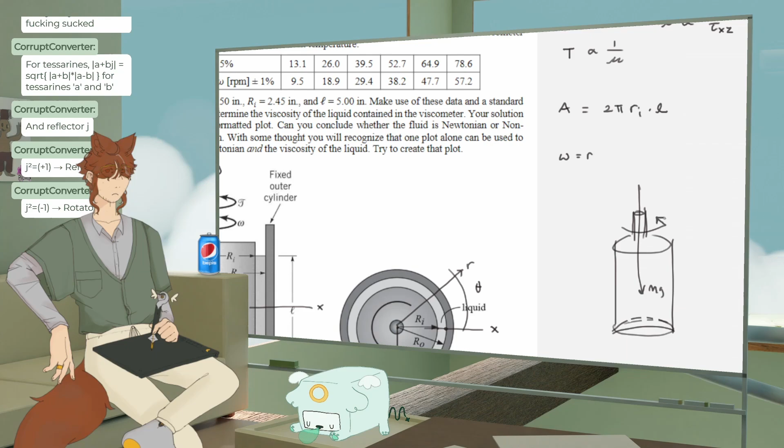Don't worry, I don't know why the top is so defined. There's an MG, very long MG. There's a torque applied this way, which has a moment, I guess. Sorry, that was a deep sigh. Which is a force that's pulling this way. I don't care about that. We're just gonna do a force pulling this way.

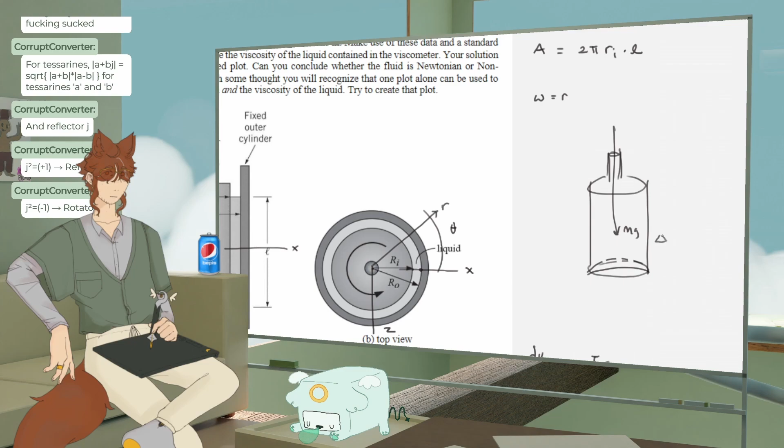I'm gonna make it as fat as I can. I could have drawn a better one. You know what? Maybe I should just draw the free body diagram from the top, since that would be smart.

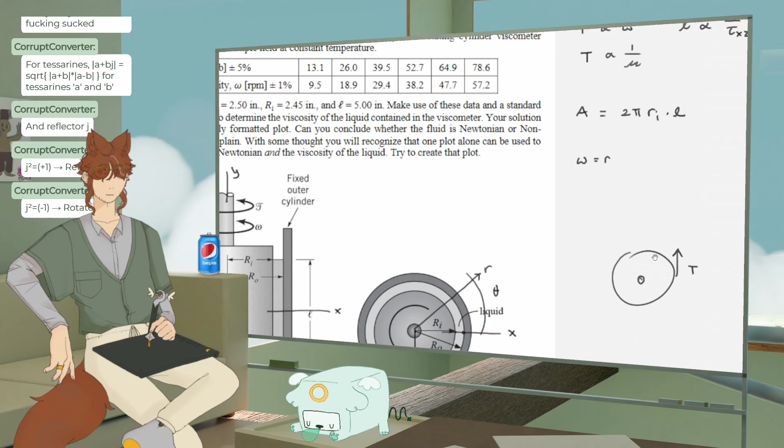Okay, well we've got a moment here. This is our moment T, or I guess I could just call it T. And then our fluid is going to be trying to be pulled this way, so it's going to have this sort of adverse, sort of like fluid shear that's happening. And the weight we don't care about.

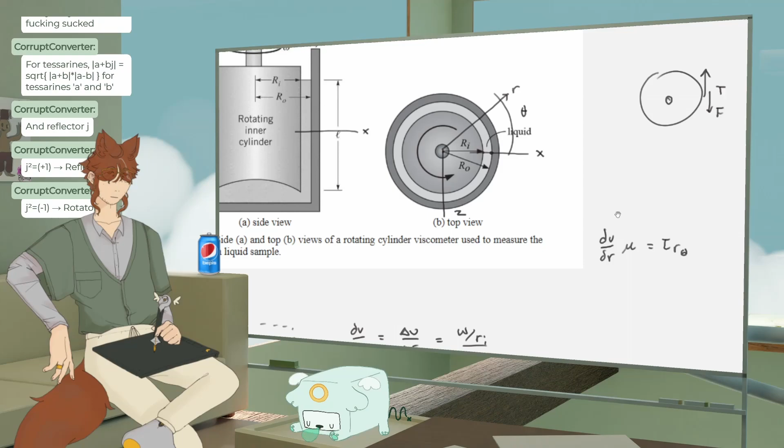Now, okay. This is definitely not F over A. This is like MC over I, which is a bar property. It's a shear applied to a circle. But you know what? MC, let me think, MC over I is gonna have L in it.

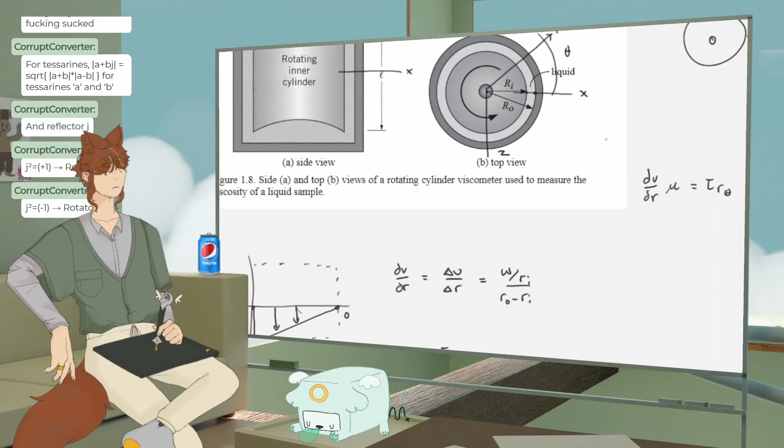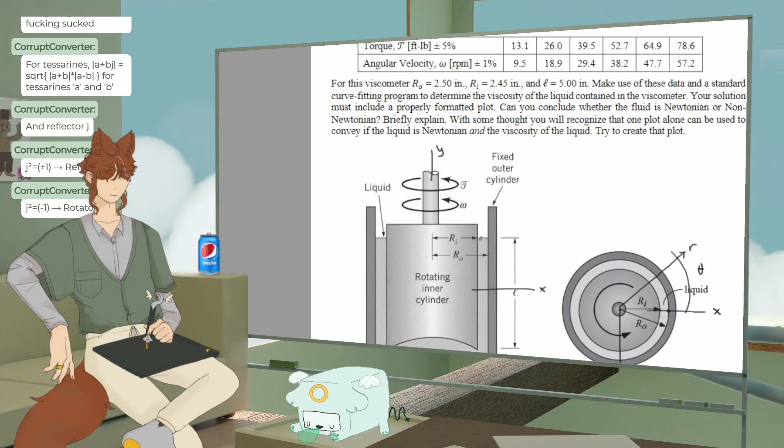You know what? I'd have to say the shear in this is this value, and the shear in this is a different value, and the shear in this equals the shear in this. I don't want to do all that. I'm just gonna say F over A. I'm the worst, I'm just gonna say it's T. Input T over Ri times L.

You know what we got? W over Ri times the difference between these two, times the viscosity, equals input T over Ri times L. It's good enough, baby, it's good enough. It's an approximation, it's not perfect, but I'm gonna put a note.

Probably MC over I, lol. Good enough. Definitely not good enough for government work, but for a problem I didn't actually technically need to do, because he said only do one of them, and I did two of them.

Okay, let me take a look. Let me see what this reflector thing is. Sorry, had to do some work.

Okay, J. So J squared is positive 1 is a reflector. J squared is negative 1 is a rotator.

So when you're saying that, is that like different definitions of a tessarine? When you're defining a tessarine, do you choose what your four things are representing every single time? So you really have... I'm buffering.